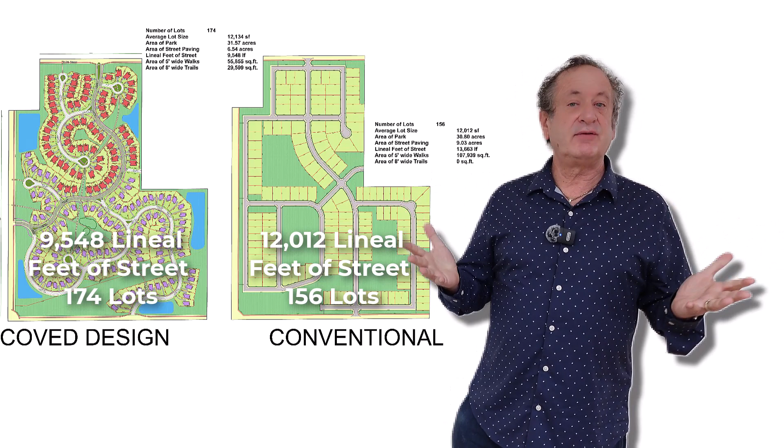The typical development that we have designed has a demonstrated 25% reduction in street length. Now, every development is different, so maybe it's only 5% of one development, or maybe it exceeds 50% in another development. Every development is going to be different.

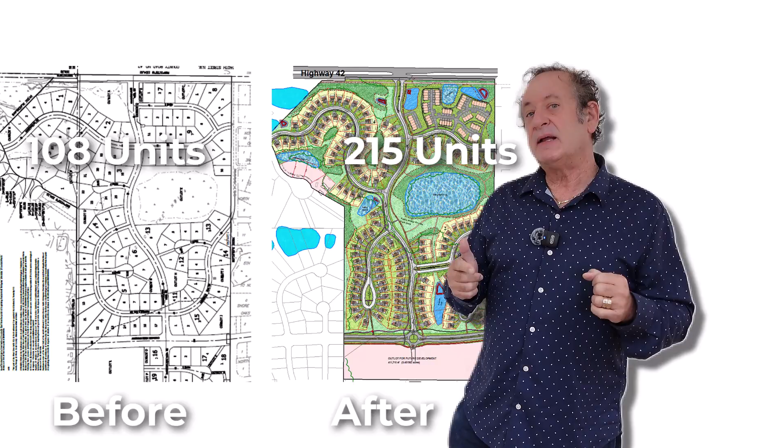It doesn't necessarily mean it's going to be 30% less cost to develop land, because there are some costs that go up. But in the end, you're going to end up with a much more beautiful and exciting neighborhood that certainly isn't going to cost any more than if you were to develop on a conventional method. But the key thing is we're working with real numbers here.

A 20% reduction in street length is 20% reduction in the length of sidewalks that go along the street. It's 20% reduction in the utility main. So in other words, we're reducing the right-of-way that would have otherwise been dedicated to the city, and we're putting it into sellable lots. So instead of the developer buying, like, 40 acres and giving 10 of those acres back to the city and saying, here's your streets, maybe we could reduce that 10 acres to 7 acres, and then that 3 acres is spread out through individual ownership to increase the property values.

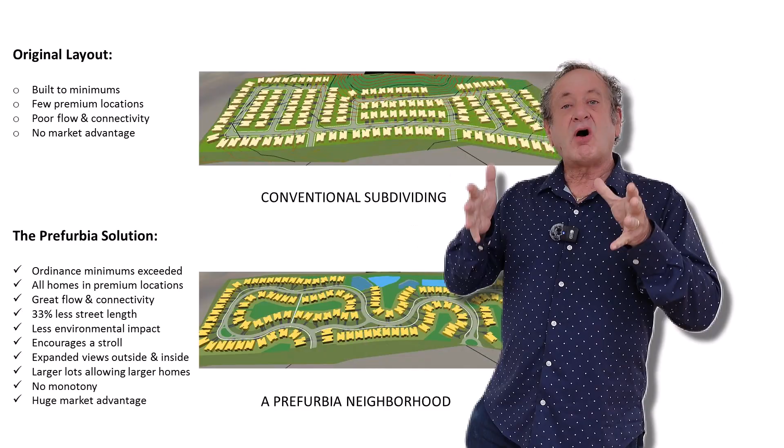So from a city's perspective, the cost of maintaining all that infrastructure plummets, and from the developer's perspective, the value of the lots increases, and then from the city's perspective, because you have higher value real estate, what you've got is more tax base.

If you look at the past 100 years, from an architectural perspective, about every decade, there's a new architectural facade or model. For example, in the 20s, the homes had a beautiful big front porch, because there's no air conditioning. But what happened is around the 30s and 40s, you saw the porches disappear, and people wanted to live in their private spaces in their backyard and not be so social in their front yard.

And then in the 60s, the homes got wider, the 2-car garage, the 70s and 80s, the 3-car garage. In fact, in the 70s and 80s, the home was garage, and then the home hid behind the garage in a lot of these models. And now we're coming into an era where we're going back to a front porch look, but the homes are still oriented to the back. So that means that you've got this front porch, but nothing really pushes you to that front porch.

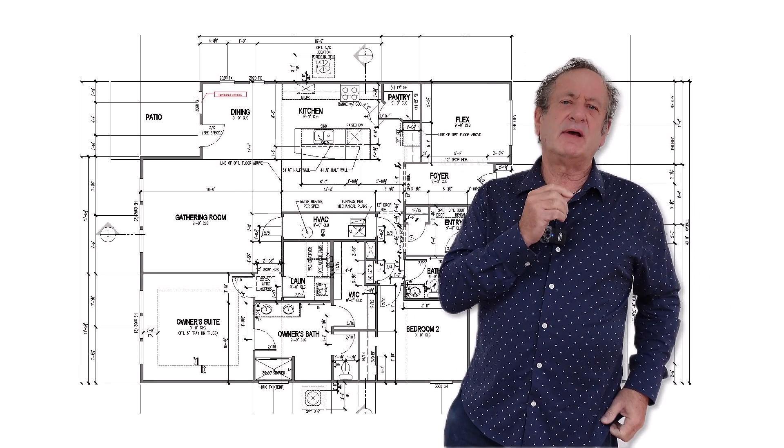You might notice that decade by decade facades change, but when you look at the interior floor plan of a house, for the last half century, it's hardly changed at all. But what if the concept would be, when you're designing a home and you're designing the neighborhood, if you have all this new open space around the home, why aren't you designing the interior floor plan, the walls and the window placement, so that when you're in the home, you enjoy that extra space?

For the past few decades, where we've really made progress is in this merging of architecture and planning to create a higher form of residential living. It began with a unit we call the bay home, which is essentially a rear-loaded, narrow but deeper single-family home, full front porch, staggered so that living spaces get a panoramic view of common space and not looking over a street with parked cars. This method significantly plummets the amount of pavement and the cost of development while increasing green space and increasing density while still providing a suburban sense of space.

Another architectural method that we pioneered is called architectural shaping. For example, this is Trisona in Viera, Florida. Every home is shaped because we're holding a constant angle between the two lot lines. That means a home can get wider in the front or wider in the rear. And we brought that up to address the narrower 35-foot and 40-foot wide products.

But Viera builders decided to throw out all of their floor plans and start fresh to have it on all of the 1,350 homes that they built in Trisona. And we demonstrated a 38% reduction in street length compared to the previous plan. And this added 19.3 acres of usable land in the north section of this neighborhood alone.

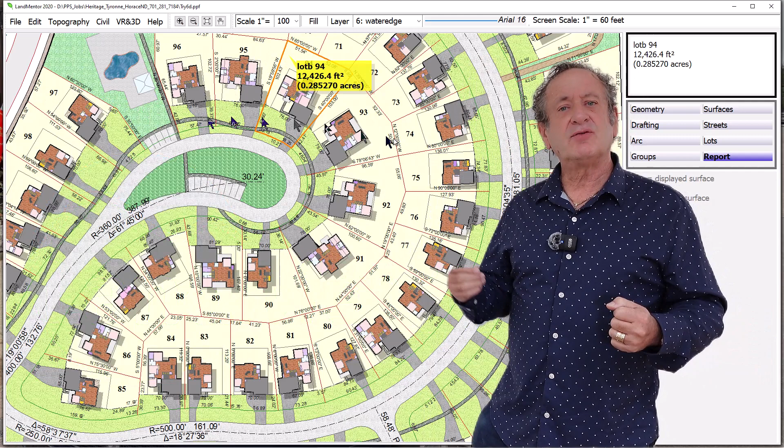Now, none of this would have happened if we used the same CAD-based products of every other consultant. So for the past 2 decades, we've been developing what we market now as LandMentor. 22 years ago, I sat down with my programmer and we said, why can't software be easy to use in civil engineering and surveying? We eliminated commands. CAD has thousands of commands. We have none. We wanted to make a user interface that was fun to use while expanding the capability beyond CAD for land surveying, civil engineering, planning, architecture, and much more.

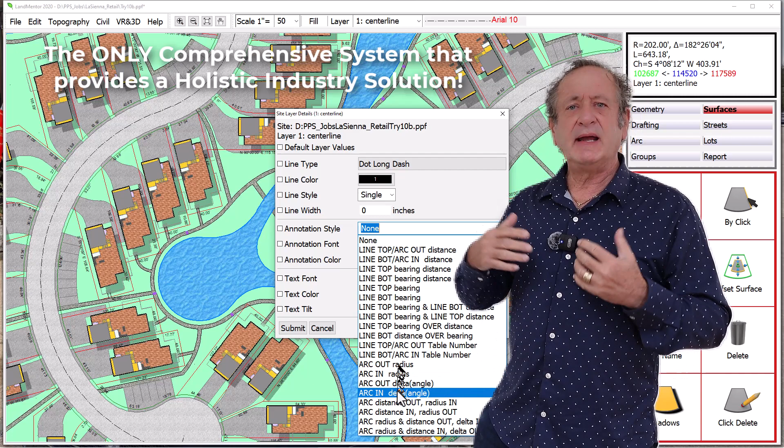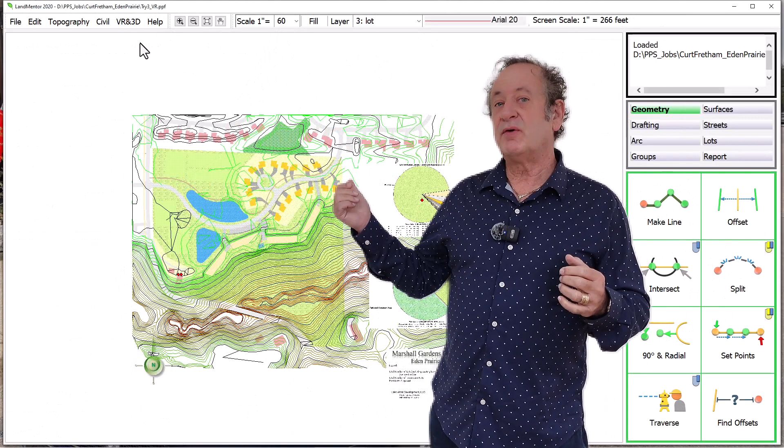When was the last time as a land developer or even a city that you saw 3D as a normal deliverable? In this era, we're still looking at 2D plans nobody can understand. So 22 years ago, Keith and I decided to use video gaming for the basis of our software 3D. So the trick is to go from a seamless 2D working environment into a 3D environment with the least effort.

And every site that we design, we deliver 3D at no extra charge. But not just 3D, we deliver it in a format that the clients could just click a file, open it up, and they could play their site just like a video game, using an Xbox 360 to move about the site, go in the homes, look out the windows, and experience what they are.

But more important, they could don a VR headset and they're no longer looking at a 2D plan or a screen in 3D. You're projected into the development, and we were the first on the planet to use virtual reality in public meetings. But that's not what the cool thing is about LandMentor.

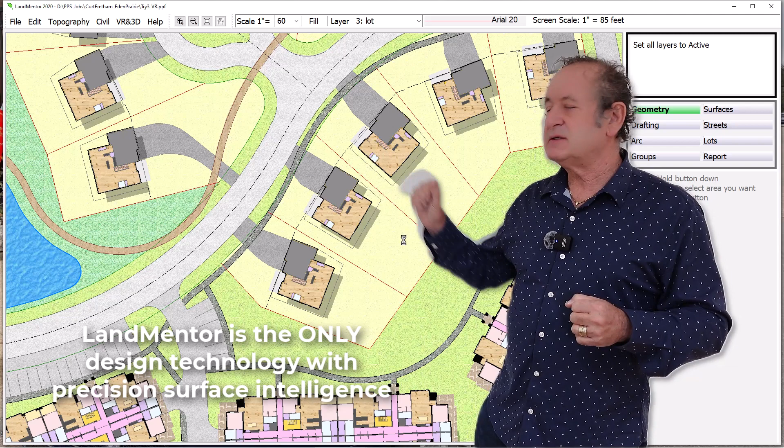When you look at the colors and the textures and the detail that we deliver, each one of those colors and textures represent a man-made element that we're adding to the ground. In a CAD-based system, to get this kind of data, you would take weeks or months instead of seconds or minutes added to the plan in LandMentor. And that gives us the power to analyze the efficiency of a plan and report it.

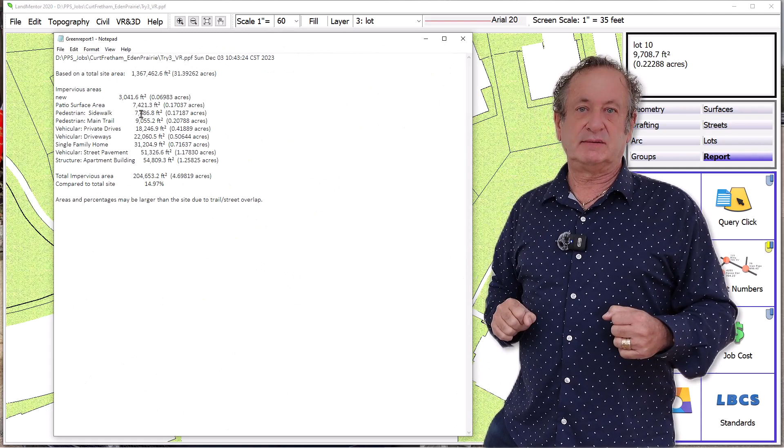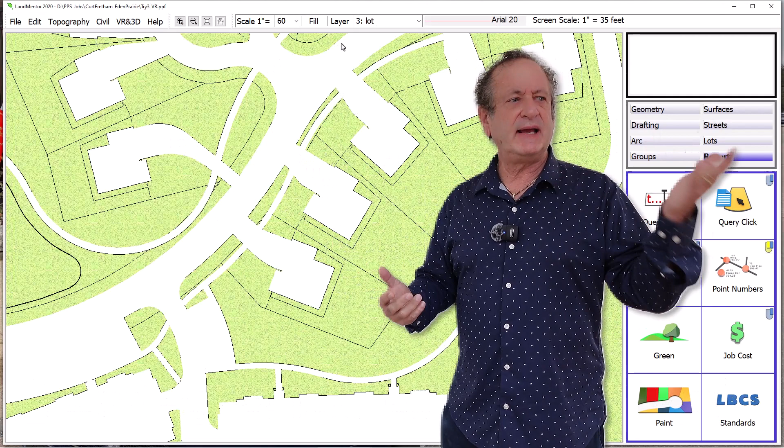So we've developed a technology that doesn't take months or years to learn. It takes days or maybe a week to learn. And this includes all of the civil engineering, surveying, planning, everything. We could reduce the learning curve. Instead of schools teaching months or years of a degree on how to use CAD, they can now take that time to teach people to think differently and think better and replicate some of the benefits that we've brought to

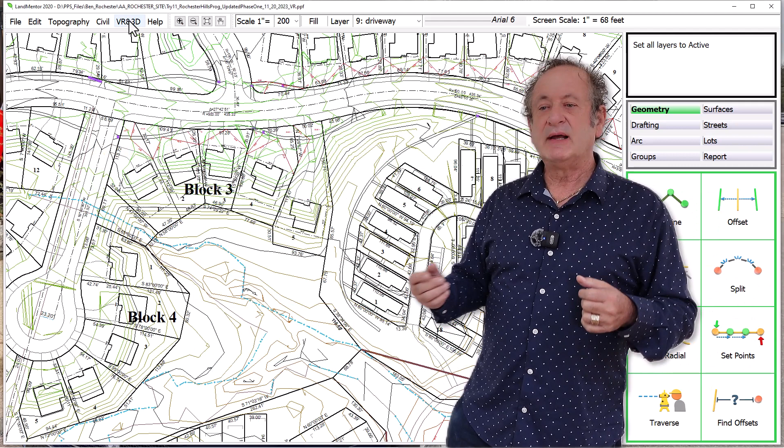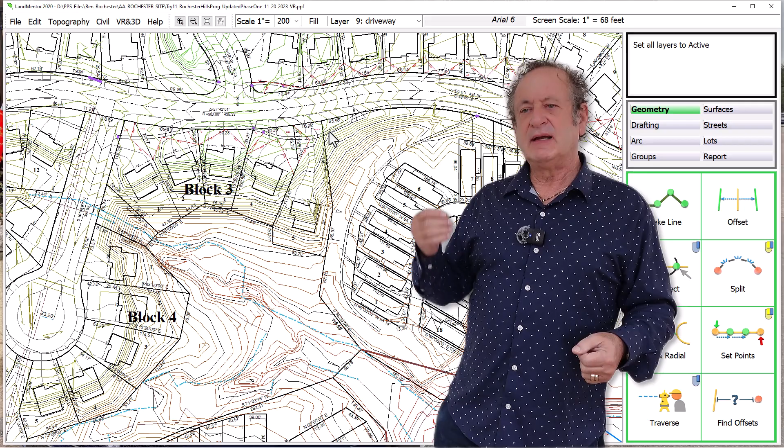the development industry. I believe that we can create a new generation of planners, architects, engineers, and surveyors that are better equipped to create better communities for everybody in this world. And I just don't mean better by having more space or views, but better because less infrastructure is less environmental impact, it's less cost, and it solves a lot of issues and a lot of problems.

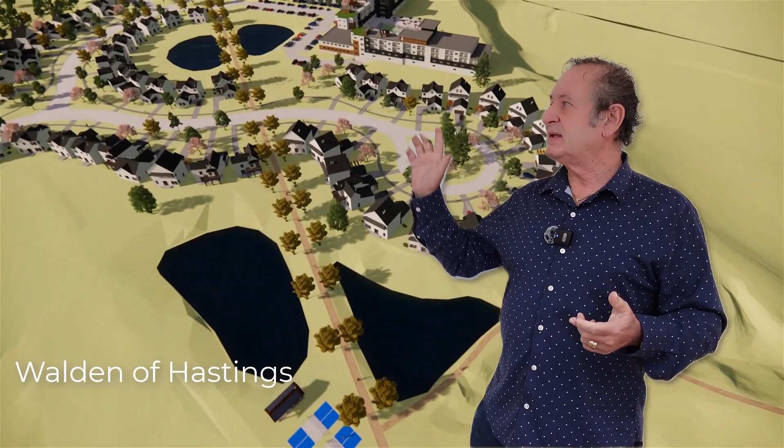There are roadblocks. For example, you can have some software that designs the neighborhood in just a matter of minutes, if not seconds. And this is why we have developed the methods, the technologies, and the training, not just for consultants, but for developers and builders to make better decisions, for cities not only to make better decisions that could significantly reduce their infrastructure, their cost of maintenance, and increase their tax base while helping solve the affordable housing situation.

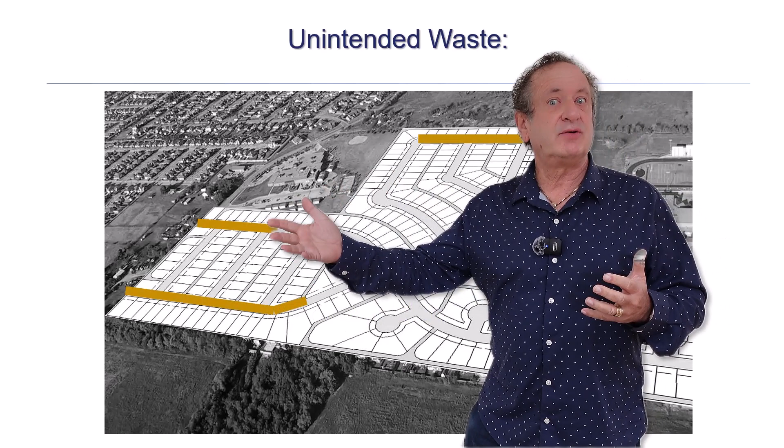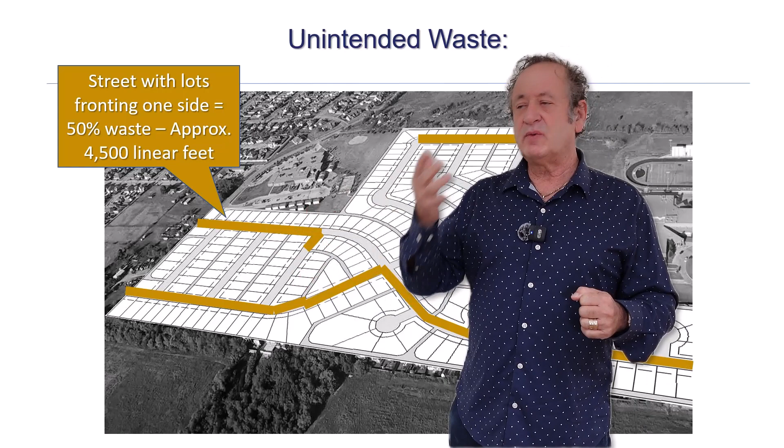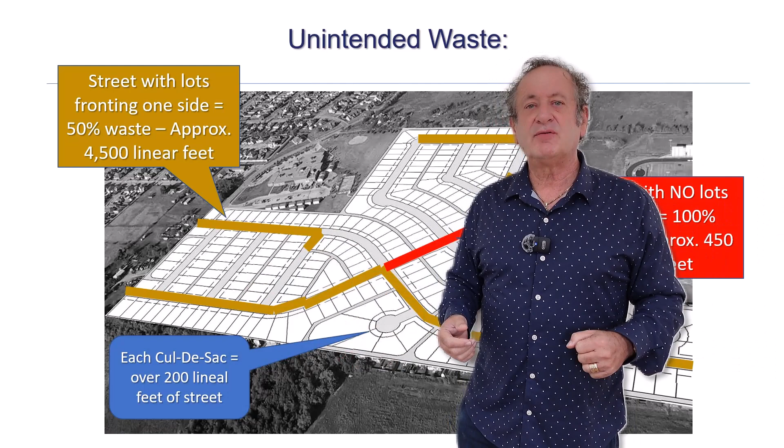And instead of looking at a 2D proposal that nobody understands using drafting standards from the 1800s, we can empower cities with VR systems and better technology so that when a proposal comes in, they can communicate to a developer, hey, you're building an extra mile of street. You don't want to spend an extra $5 million on that street, and we certainly don't want a mile of extra street to have to maintain forever. Why don't you take that right-of-way, put it in your lots?

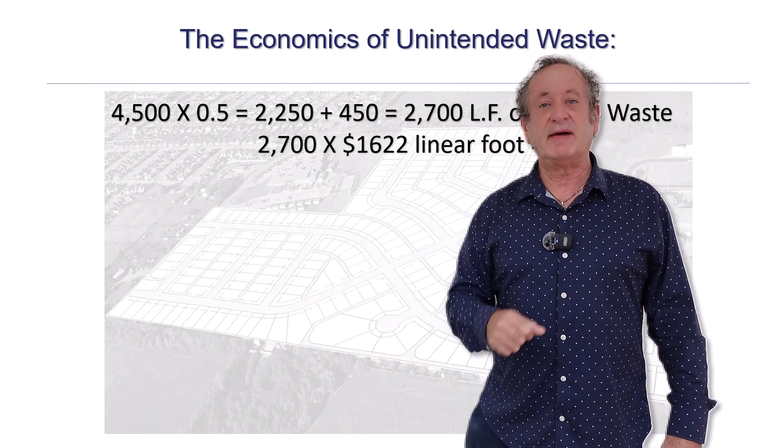But cities don't have that feedback because they don't have the technology that we developed and they don't have the training that we developed, which opens up entirely new possibilities for the entire land consulting industry. Developers who pay the consultants need to understand this and hire consultants that want a new era instead of just blindly doing another gridded subdivision.

But what goes in that ground is going to be there for hundreds of years and affect thousands and thousands of people. Something that's done quick instead of done right. Because that land plan is the developer's business plan and will make a major difference for the builders to sell their homes. So in conclusion, planning shouldn't be about social engineering.

We shouldn't use the car as a scapegoat and say we're destroying the world because of the car, but as a result, for pedestrian connectivity, let's build a whole lot more street and make little tiny blocks so that we actually increase the cost of development and decrease the green space. We believe in the opposite. Create more efficient and better design. We increase the livability without increasing the cost.

And we've been very fortunate that over 300 developers for the past 30 years have retained us to design 1,700 communities in 48 states and 18 nations. And the income from that has gone to develop this technology that could benefit the rest of the world, leaving a legacy that will last forever.